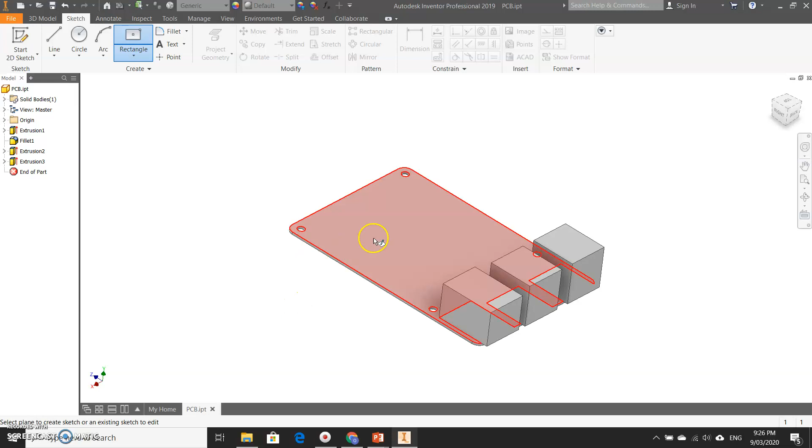Now, exact same process. We click on the sketch tools that we want to use. We click on the surface that we want to draw on. It rotates it round for us. Now in this case it's probably easier to draw on it like this.

We'll zoom in and we're going to start with this 3.5mm jack, which is going to have a center of around about here, and we're just going to draw a rectangle. Now I haven't clicked again, and you'll notice that you should just be following me step by step. It's good practice. Okay, so without clicking, it allows you now to say that the length of that 3.5mm jack in total is 15mm. So type in 15, press the tab button above the caps lock key, and the width is 7mm in total.

Okay, now that is sticking out 3mm over the edge of the PCB. So I can click on the PCB, I can click on the edge of this, and I say that that distance is 3. Press enter. Okay, where is that now in relation to the sides?

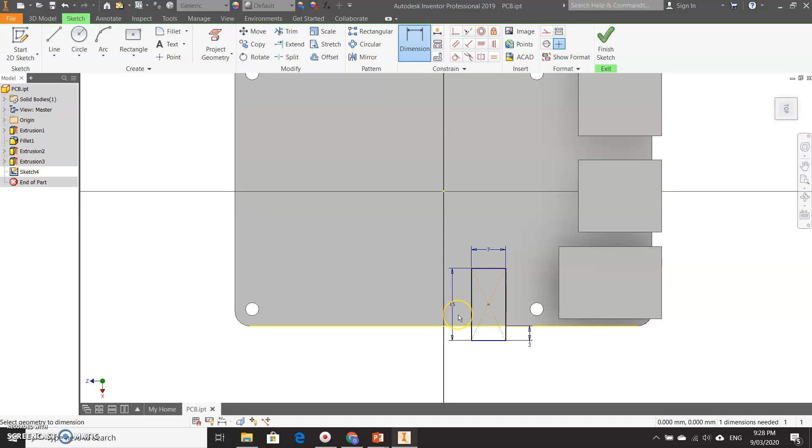So, on the drawing that I've got here in front of me from the Raspberry Pi company, it states that the dimension from the center point right here to the end line over here should be 53.5mm. Type in 53.5, enter. Okay, next.

We're on to the HDMI cable. Alright, so again we know that we've got a rectangle to draw. It just about overhangs the side slightly.

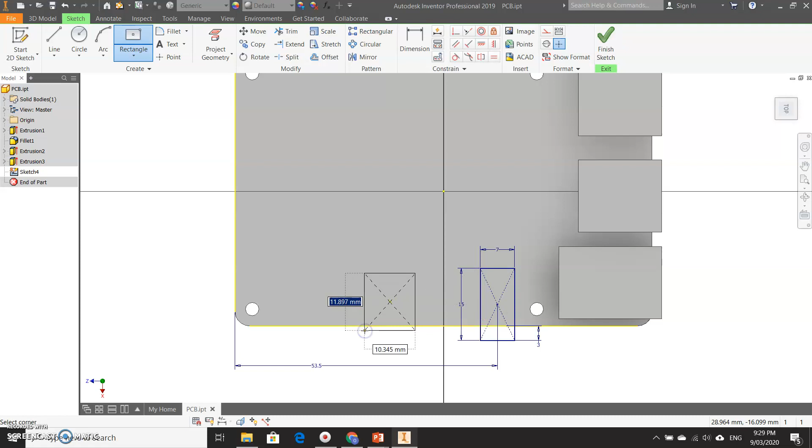The width, or sorry, the depth that's highlighted in blue on my screen is 12mm. Press tab on your keyboard again, and the width is again 15mm. 15, enter.

Okay, next thing we need to do is see how far it is sticking out over the end of the PCB, and it looks like it's 2mm again. So again we use this dimension tool, we click on the end, we click on the end of this, and we say that the dimension between those two should be 2mm, enter. Okay, now the distance from this center point here till this end line here should be 32, enter.

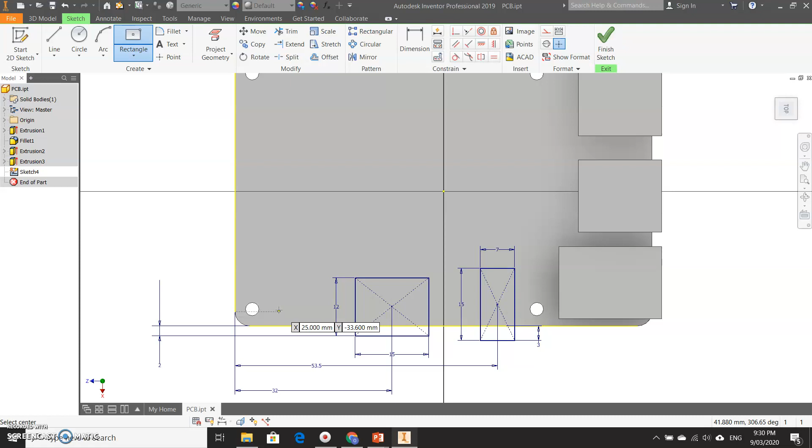Okay, the next dimension that we need to use is for the power in. Okay, and again it is overlapping the edge, so I'm going to draw the center of it here, drag it out over the end of it here, and I'm going to say that the depth of it is 6mm. Tab, and the width of it is 7mm. 7, enter. Okay, now the depth from this line to this line should be 1mm.

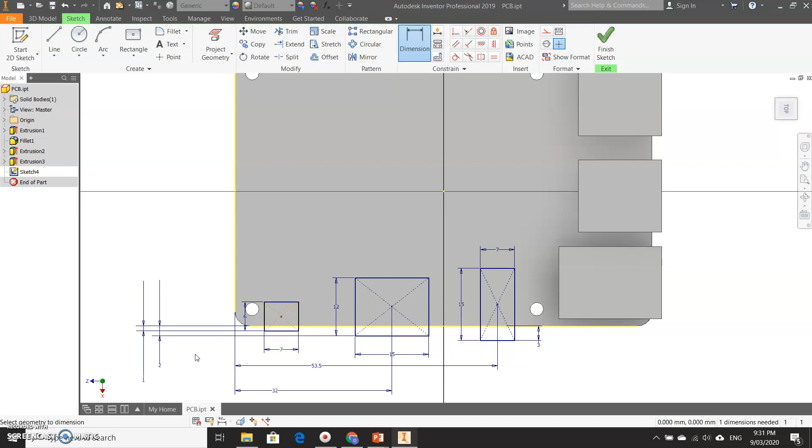Okay then, right, now again as the last one, and if you look in from the side there, you'll be able to see that the dimensions for each of these things are different. For example, the height of this one's supposed to be 6 millimeters, the height of this one's supposed to be 6.5, and the height of this one, not actually stated on their drawings, is 3 millimeters.

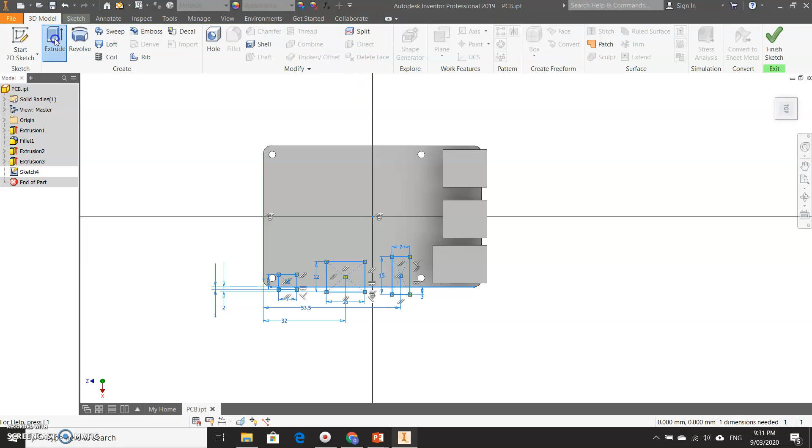Okay, so what I'm going to do then in that case is I am going to press escape on my keyboard. I'm going to draw a box around everything, including the center point. Okay, I press Ctrl C, and I'm going to go to model. I'm going to go to extrude, and I'm going to select any one of these. I'm going to do one. The first one there is the headphone jack, which is going to be 6, and I'm going to press enter.

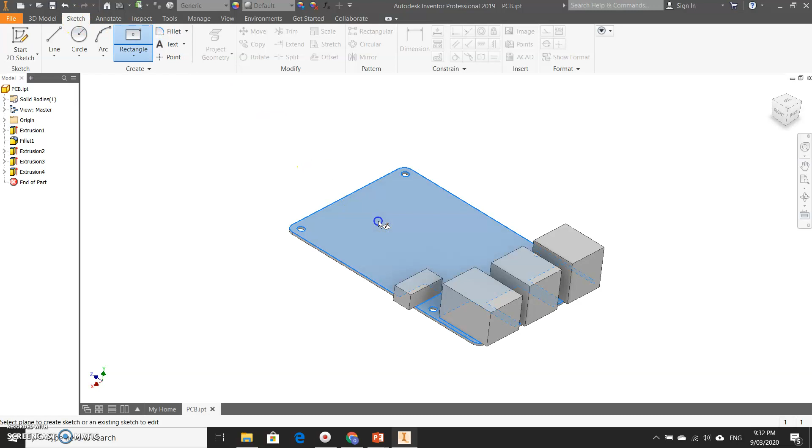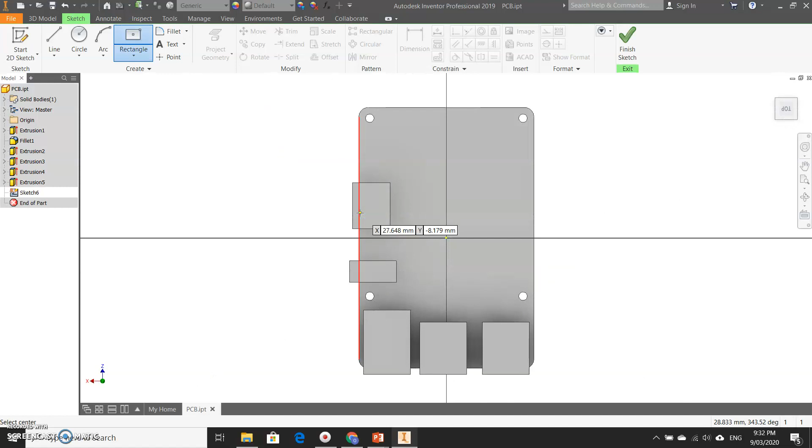Now we go to sketch. We click on any of the drawing tools again, draw on the plane that you want to draw on, press Ctrl V, and it should paste everything in the exact spot as the first time. We go to 3D model, click on extrude. This one here is going to be 6.5. Press OK. Again, click on the sketch tools, click on the top of the PCB, the side you want to draw on, click Ctrl V, that's paste, or you can go edit paste, it doesn't make any difference as long as you paste.

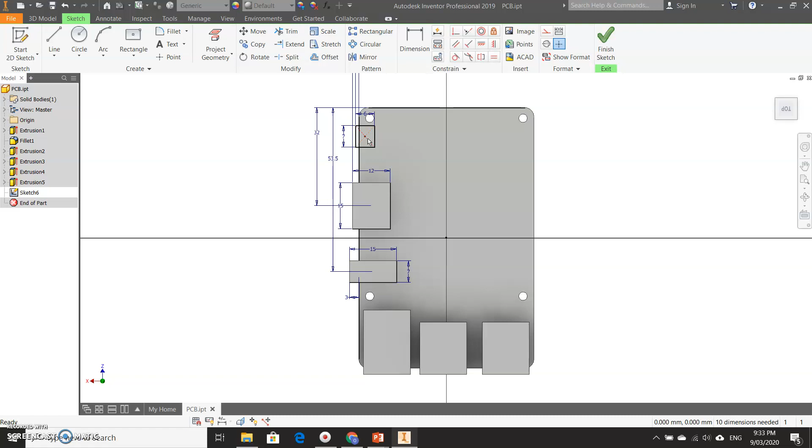Now this drawing here for the power source, I did measure it and I got 3 millimeters or 2.5. We'll go with 2.5, it's probably closer. Click on extrude, click on that surface, and that needs to be 2.5. Press OK. There we go.

Now it's a very rough, very rough PCB, but that's all of the components that you need to worry about in terms of giving an outlet on your enclosure. At that stage, we're pretty much finished with the drawing section of that. If you really want to add in the detail with the boxes here, that's fine, and with the hole in the middle of that, you can do that. If you want to round the edges of this, by all means have at it, but as a real rough guide, I think we're pretty close there.

So what we're going to do is just go to save, and now we can start looking at how to render. We can go environment, click on Inventor Studio, and start looking at what we can do with this drawing.

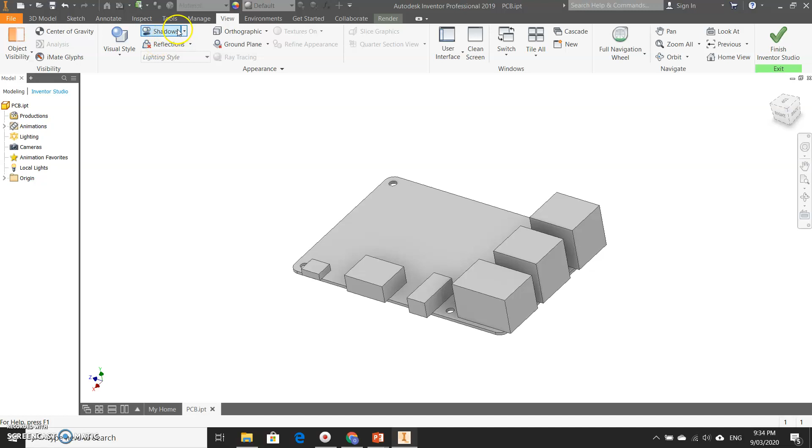Alright, so we've got Inventor Studio open. We can go to view, cast some shadows down on the ground. We'll put on all of the shadows. We can get it looking realistic, so we'll take off all of the lines and stuff. What else can we do here?

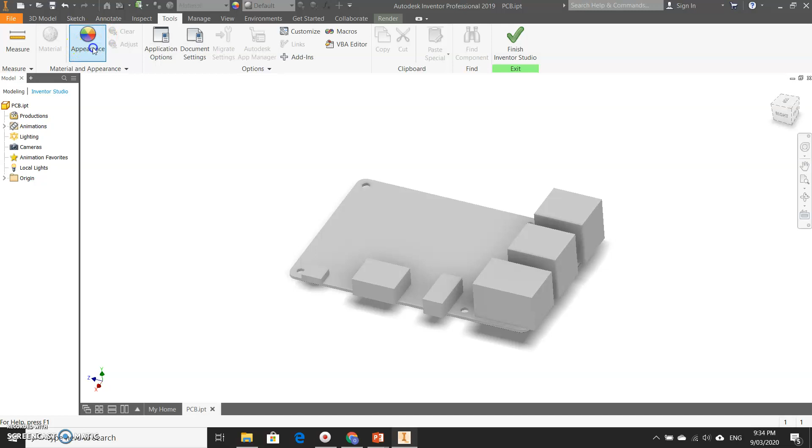We're looking for this appearance tab here, so if we click on that, we can find some materials for each of the sections. Like these parts here should be some kind of metal. We can click on metal just as a very basic option. It's most likely that they're using aluminium, so let's go down and find some aluminium. Does it look polished? Not really, so it's kind of a flat aluminium color.

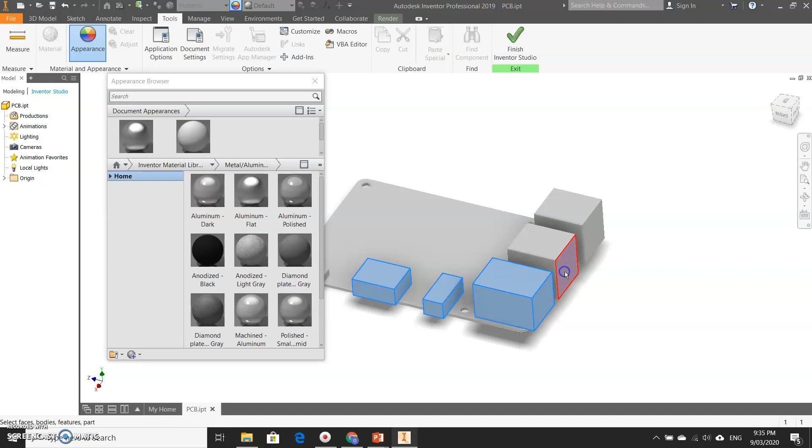You can add appearance to specific sections, or you can click on each of the areas that you think should be aluminium. So we can click on all of these areas in here if you want to. Now I am highlighting multiple surfaces at one time by clicking on the shift button on my keyboard and clicking on each of the areas that I want to highlight. I'm going to do it real quick, clicking on this up arrow here.

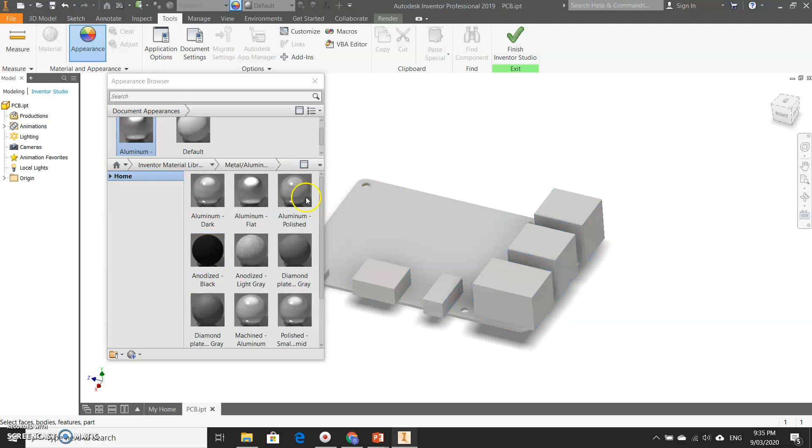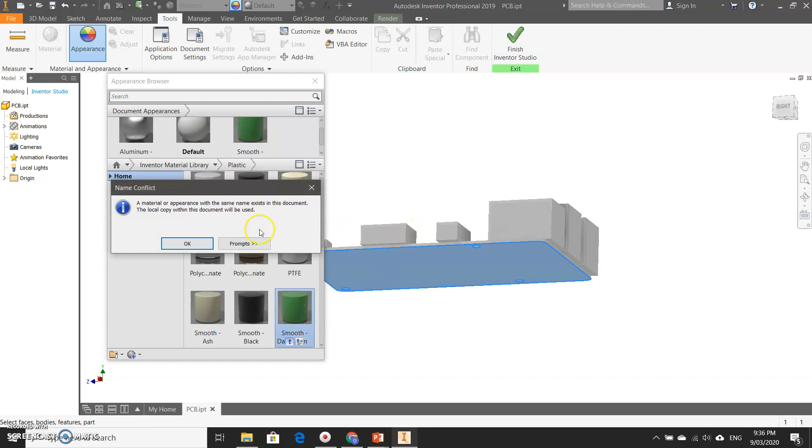OK, alright, there's probably not much of a difference going on there now, to be fair. So what about the plastic? What if we say, oh, that surface got to have this type of finish on it? Now realistically, you can have as much fun as you want with that. I'm not going to spend all day showing you how to render on here. There are plenty of videos on YouTube and things for you to play around with to figure that out. But as a very rough guide, that's how you get into it.

You then go over to render. You can go into render image. You can set up all of your render settings. Make sure that you're sitting up around about here, not much more than that. Chances are, really, your output, so where you're going to save it to, and chances are, really, if you're up in high, you have got a good chance that it is going to crash on you.

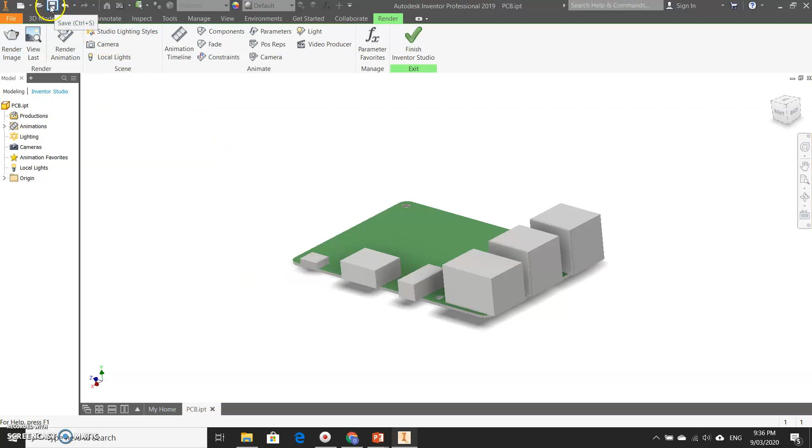So before you click on this render button, you need to click on save, because you will lose your work otherwise. Alright, so save it, and that's that done for the PCB. You can play around with as much rendering as you want, but remember, you've got your enclosure to design as well.